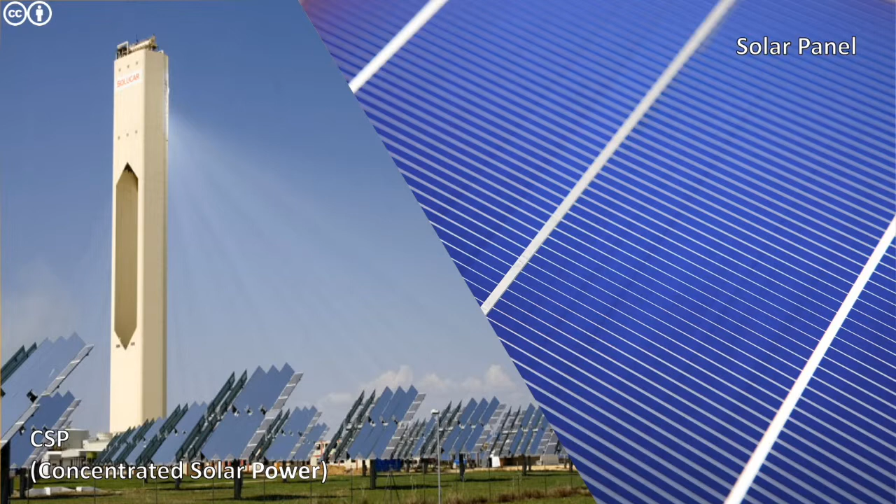Solar power: currently, we can utilize solar power with CSP and solar panels. The advantages are obvious. The operation cost is low. The energy converted to electricity is easy to utilize and distribute. Sunlight is widely available, giving it a high potential. And most importantly, it has little emission during operation. The conversion efficiency is rather acceptable.

Normally, we can get 15 to 25% efficiency with CSP and 20 to 26% with the now commonly used silicon solar battery. Cost is also promising, which is currently a little cheaper compared with the market, and is predicted to drop in the future.

But there are also major limitations. The setup cost is extremely high, and its performance depends on the sunlight conditions, which is associated with both location and weather. Finally, the power density of sunlight is very low, which is only about a kilowatt per meter squared on average.

Then let me talk about wind power advantages. It is a clean, renewable, and sustainable energy. Its greenhouse gas emission and its operating costs are relatively low compared with other renewable energy. On the other hand, its limitations include high manufacture and installation costs of the wind turbines, and they will cause aesthetic and noise problems. Furthermore, wind energy is unpredictable and intermittent. The construction of new energy production plants often causes issues to wildlife and the surrounding environment.

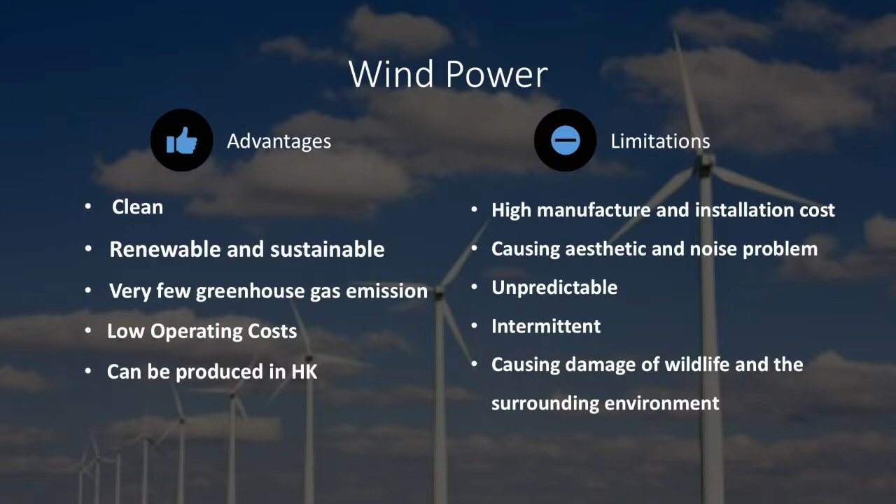About hydropower, it is very reliable energy with little fluctuations. Adjusting water flow and output of electricity is easy, but damming of water used for hydropower will cause drought, destroy the ecosystem and animals' habitat. Also, the construction cost is high, and the suitable site for building the dam is limited.

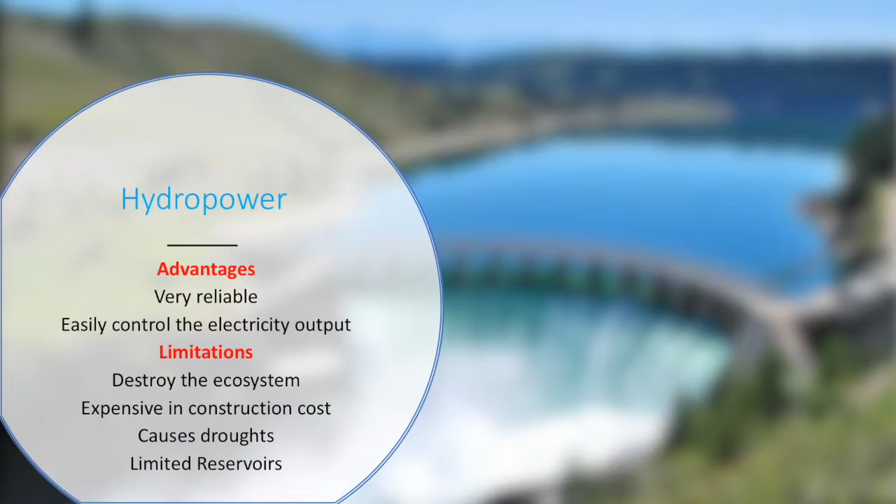Bioethanol is our major focus today, and it can be produced by any type of plant. The major raw material of ethanol is sugarcane. Bioethanol has a positive energy balance and is carbon neutral, biodegradable. Using it instead of gasoline can decrease ozone formation.

The limitations of ethanol are that burning it will release carbon emission. The planting of bioethanol raw material will reduce biodiversity and food supply. Meanwhile, the energy content is only 70% of gasoline and is hard to transport. Using ethanol may also cause some engineering problems. For example, starting a car which uses pure ethanol in cold weather is difficult, and bioethanol is incompatible with capacitance fuel level gauging indicators.

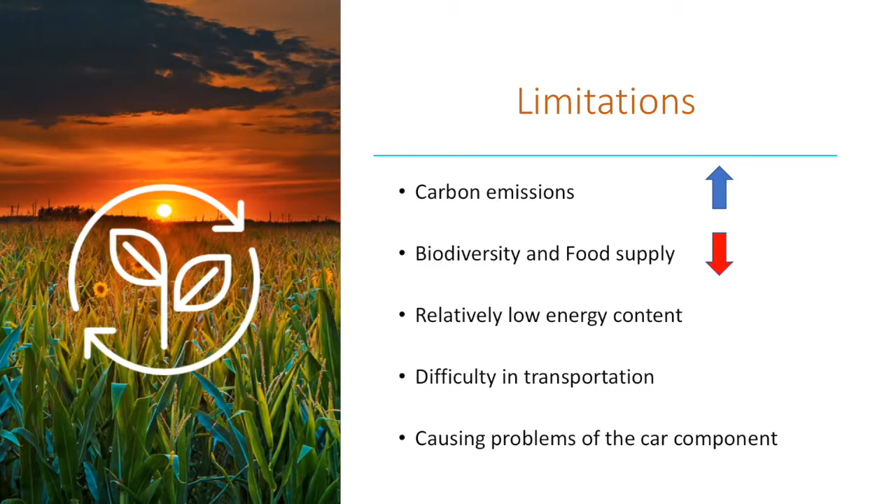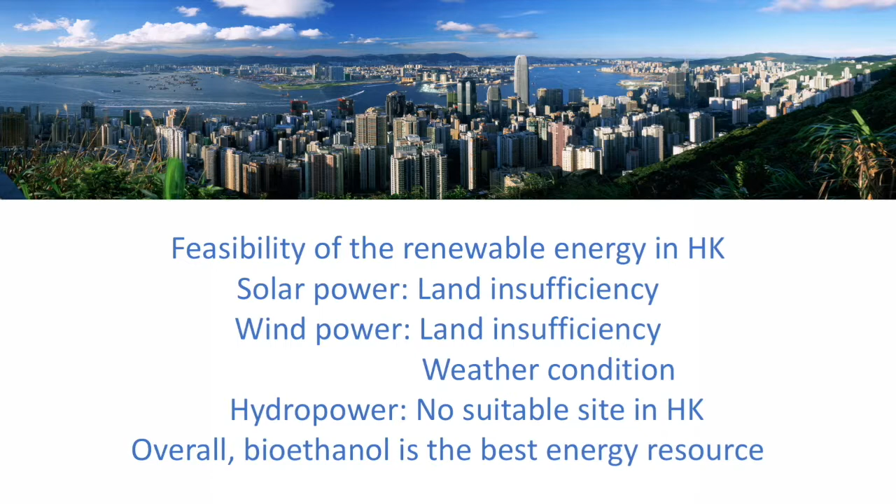Why is bioethanol the best choice of renewable energy in Hong Kong? In the case of Hong Kong, there is no sufficient place to set up the dam, solar panel, and wind turbines. Moreover, Hong Kong suffers many typhoons that will stop the wind turbine. So, bioethanol is the best choice for Hong Kong.

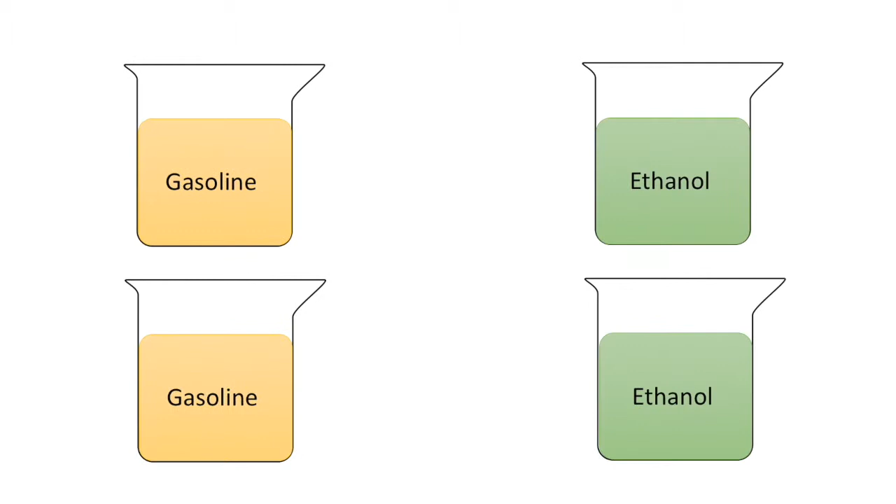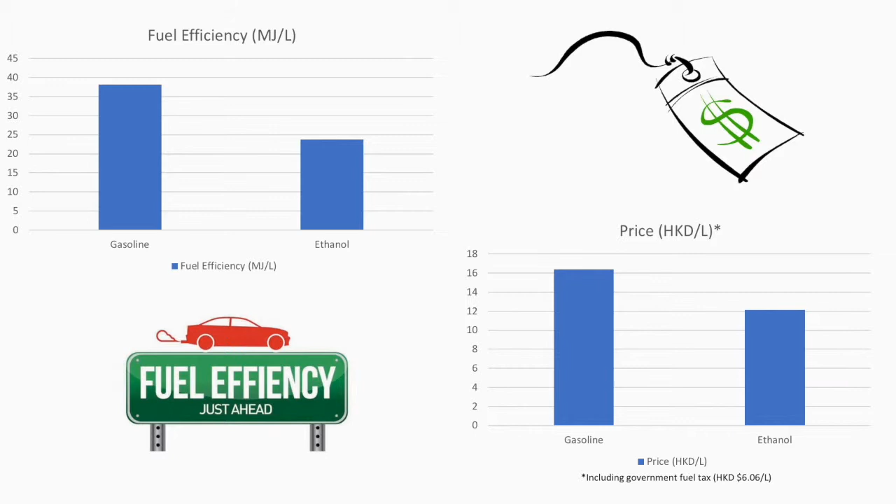What's the difference between ethanol and gasoline? A gallon of gasoline provides 1/3 more energy than a gallon of ethanol. Gasoline has density up to 38 MJ per liter with around $16. On the other hand, ethanol has density of 24 MJ per liter which costs around $12, and both of them include the government fuel tax of around $6.

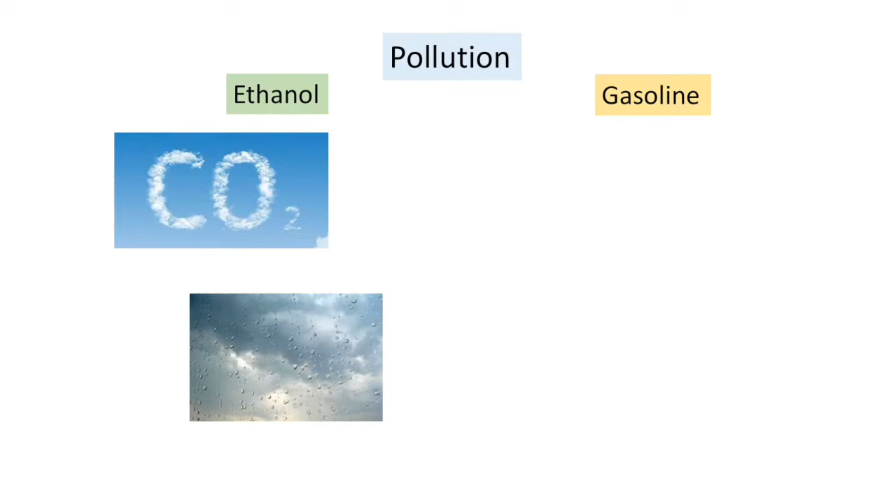Also, ethanol is similar in acceleration, power, and cruising ability with gasoline. Moreover, ethanol has less pollution emission, which releases primarily carbon dioxide and water vapor, while gasoline produces carbon monoxide, nitrogen oxides, particulate matter, and unburned hydrocarbons, which lead to severe environmental impacts. Moreover, ethanol has higher octane rates than gasoline, where it has a rating of 113 with gasoline containing only 85.

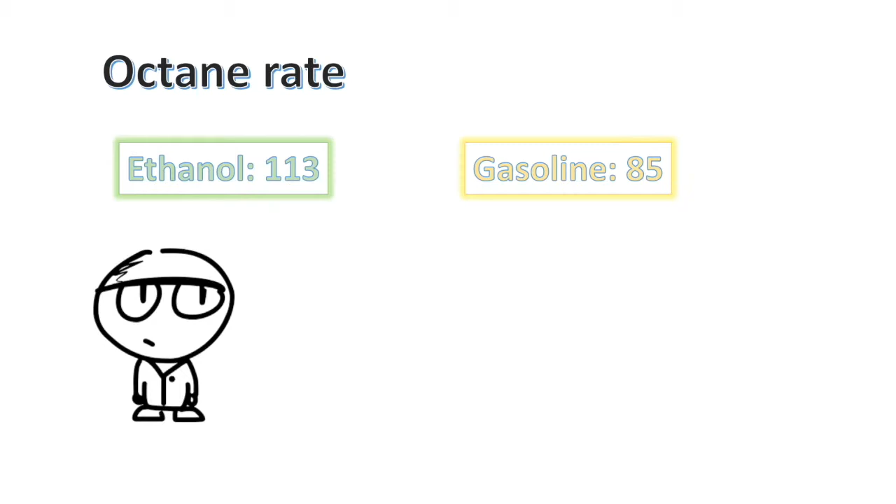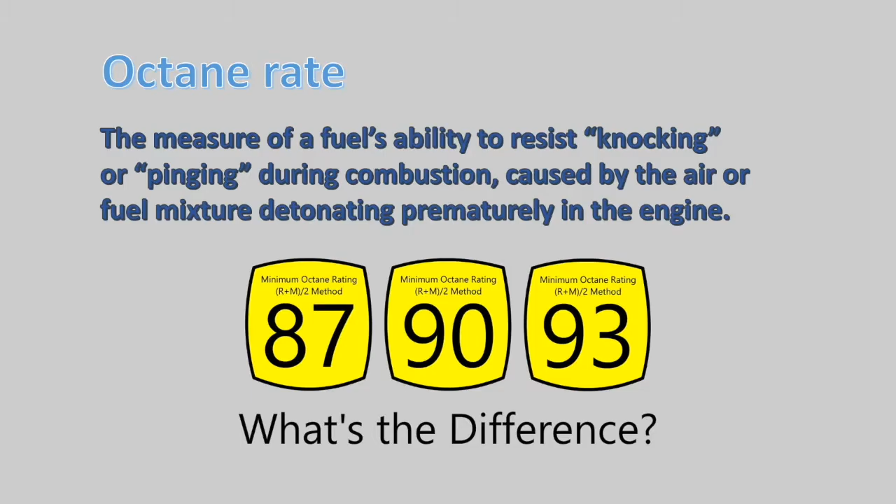But do you know what octane rates are? The official definition of octane rates is that the measure of a fuel's ability to resist knocking or pinging during combustion, caused by the air or fuel mixture detonating prematurely in the engine.

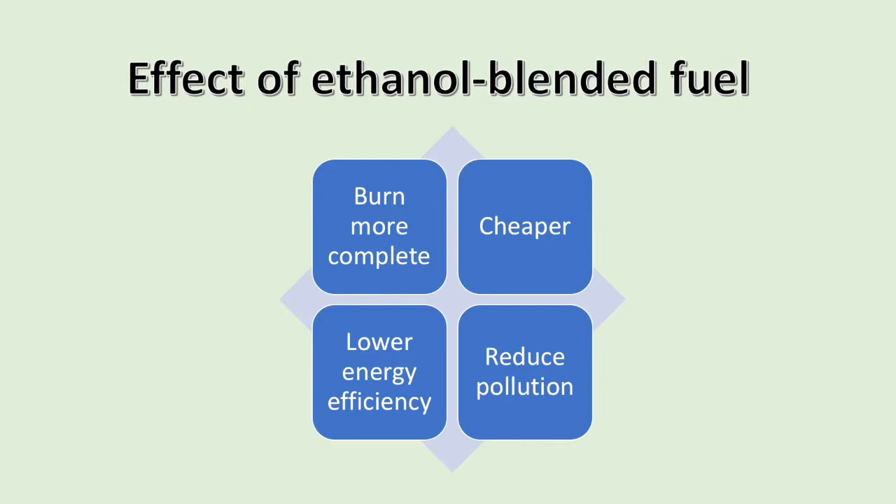And here arises a question: why do we need to mix ethanol and gasoline? The reason is that it can burn gasoline more completely when mixing with ethanol, and the price is lower than pure gasoline, and it can reduce emission. However, the efficiency of the energy is lowered by mixing the two fuels. Next, what is the engine used to burn bioethanol?

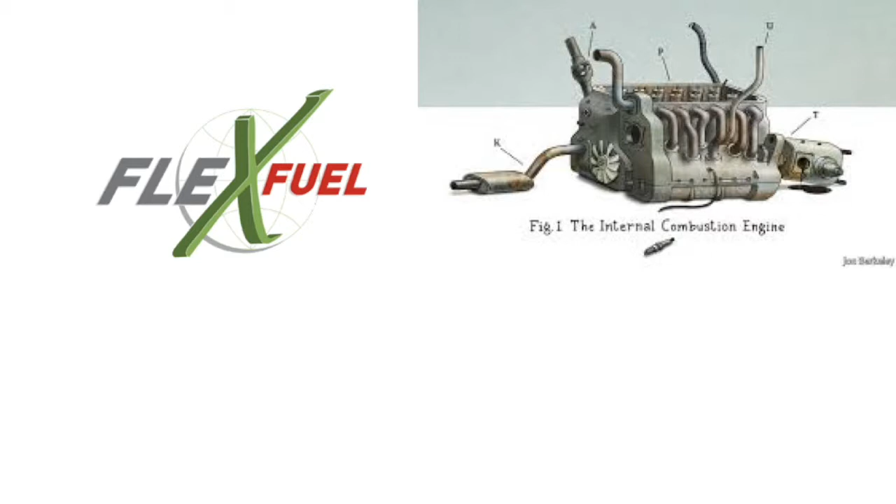Recently, a new designed vehicle called flex fuel vehicles is developed to solve the problem, which allows us to use up to E85 fuel. The engine of a flex fuel vehicle is simply the traditional internal combustion engine designed to run on more than one type of fuel, usually gasoline plus ethanol or methanol fuel, all stored in the same tank. It contains an electronic control module controlling the fuel stream to compensate for the different fuel mixture, and the whole engine is made to be compatible with ethanol.

Now I'll talk about the process of producing bioethanol. First, we need to mill the raw material, which is crushing of the cereal grains, to release the starch components. Then water and enzymes are heated and added for converting starch into fermentable sugar. Third, the mash is fermented by yeast, whereby the sugar is converted into bioethanol and CO2. After fermentation, produced bioethanol will be distilled and rectified to make ethanol more concentrated and cleaner. Finally, the product is dehydrated and the process is done.

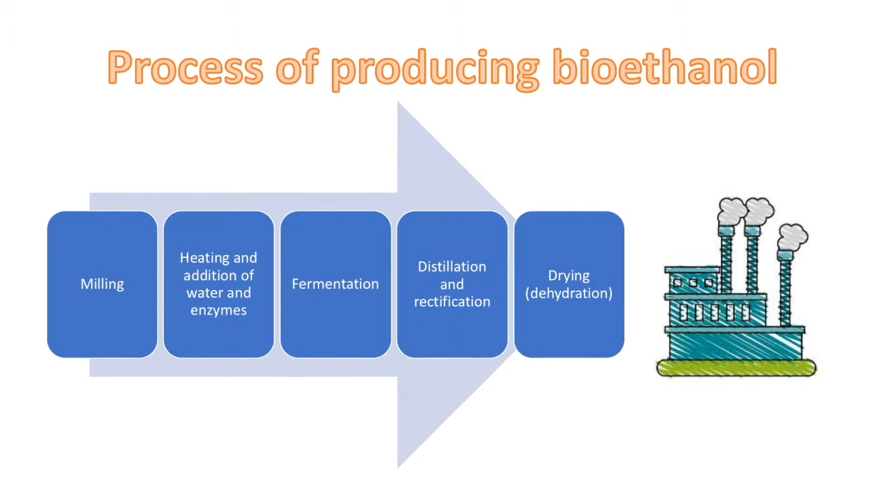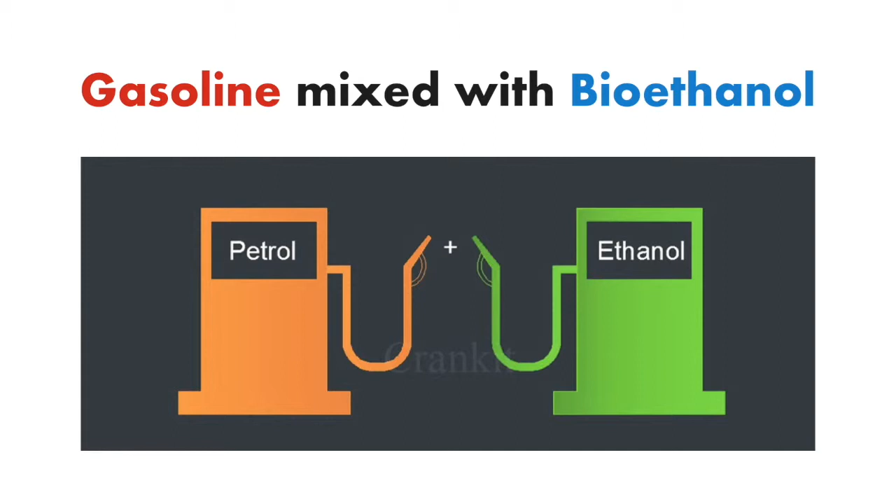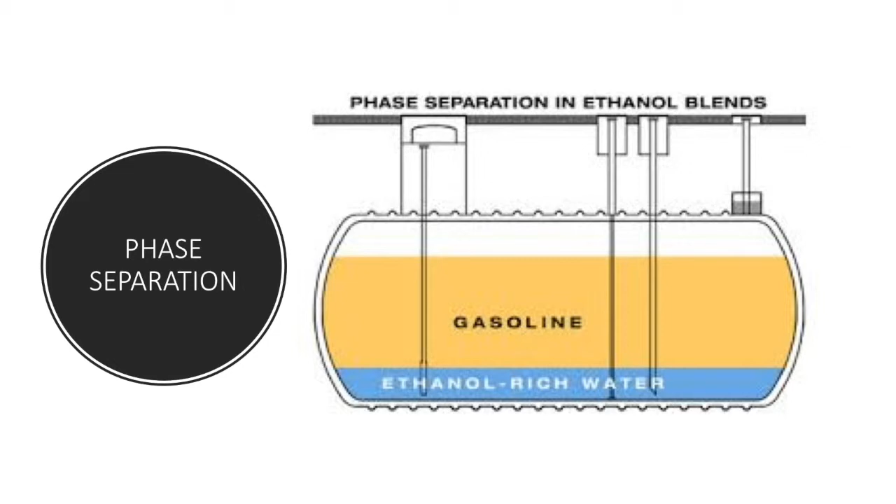However, bioethanol still has some problems. One of the main concerns is that most countries are using bioethanol mixed with gasoline, therefore phase separation may occur. As bioethanol is hygroscopic, when ethanol attaches to water molecules and contaminates the gasoline, two distinct layers are formed in the storage tank between ethanol and water, and that's called phase separation. This phase separation may damage the function of bioethanol as fuel by lowering the octane number and may cause knocking in the engine, while the engine will not run at all on the ethanol or water layer.

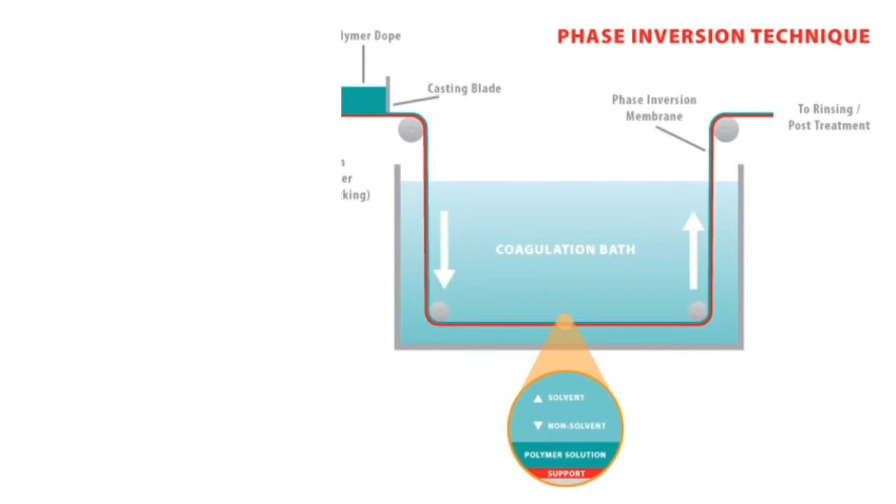Therefore, when dispensing fuels containing ethanol, proper filtration is the answer in the detection of phase separation. Special phase separation alert dispenser filters have been developed that will notify the operator of the condition by slowing fuel flow to less than 1 gallon per minute. This condition is a signal that water is present and that the tank should be tested for phase separation.

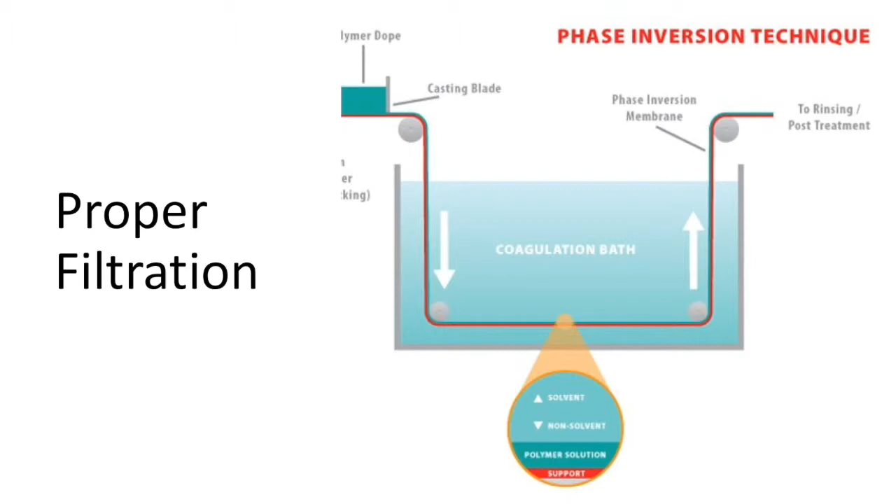Therefore, we can implement our design based on the fact that Hong Kong has a domestic population of about 8 million, and the number of licensed private cars per 100,000 population is about 8,000. Also, we find that the price of ethanol is less expensive than gasoline. For instance, the average price of E85 ethanol was $2 per gallon, compared to $2.26 per gallon for gasoline in America. Therefore, we can perform some calculation and find that although bioethanol is not as fuel efficient and cost-friendly as gasoline, its carbon emission is much lower than gasoline.

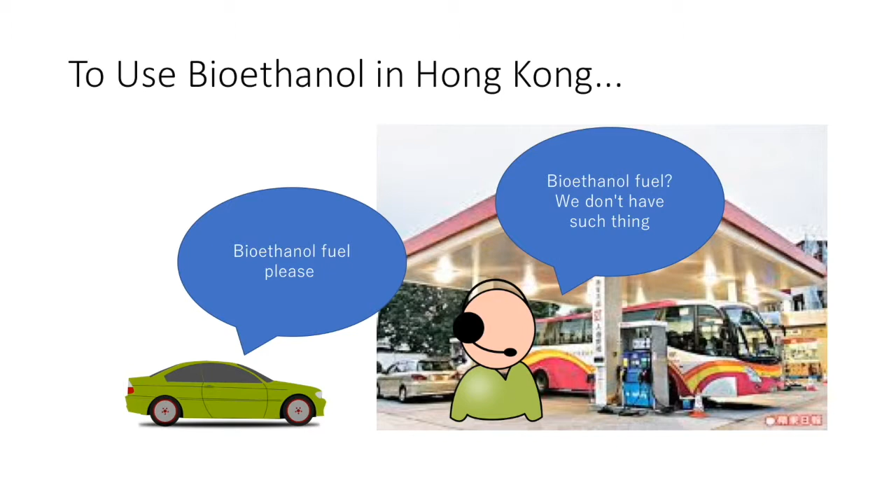Although bioethanol is good, using it can be troublesome. What I mean by troublesome is that you cannot use bioethanol easily because you can hardly find a single drop of ethanol fuel in Hong Kong. Driving your car to a gas station and asking staff to give you ethanol fuel for the car, some of them will tell you that they don't have such a thing, and the rest may ask you back, what is ethanol fuel? That is what I mean by using bioethanol is troublesome.

Bioethanol fuel has almost neither support nor popularity in Hong Kong. Almost no one knows what it is, and almost no one supports it. Even the Hong Kong government is trying to promote renewable fuel and eliminate traditional diesel fuel cars. What should we do then?

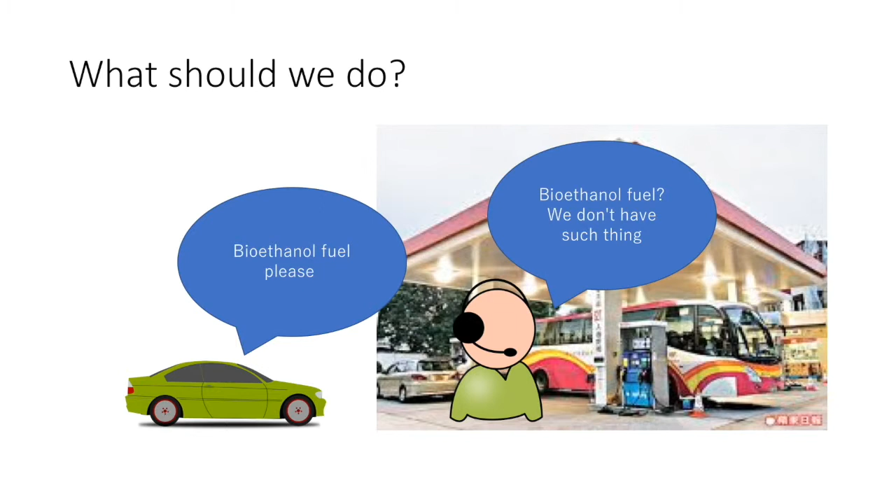First and foremost, promotion. Let most citizens and gas companies know the advantages of bioethanol fuel so more drivers will accept them. Then, with such demand, fuel companies will be more likely to introduce bioethanol into gas stations. Afterwards, awareness with respect to bioethanol fuel will be increased, and people can then easily get them.

Next is the matter of money. Currently, doesn't the Hong Kong government subsidize drivers to use greener fuel for vehicles? Then why not subsidize the use of bioethanol fuel also? Why spend money on a controversial and environmentally unfriendly issue instead of supporting bioethanol? That's not what the money should be spent on. In order to make bioethanol become widespread, using money as an attraction is always a very good choice.

Comparing with other renewable energy sources, bioethanol is most suitable for cars. Also, in recent years, the general public already knows how harmful traditional car fuels are, so bioethanol fuel is the trend. From now on, for a greener future, use bioethanol fuel.